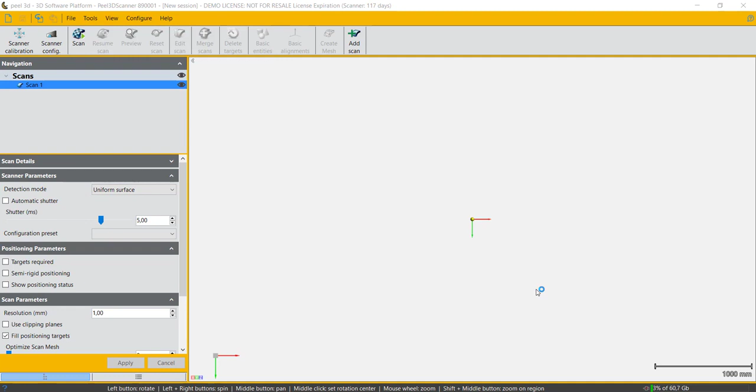Now in this video tutorial, I will show you a first glimpse at the Peel3D interface, how to calibrate your Peel3D scanner, and how to set your parameters prior to scanning. This here is the Peel3D software interface, and up here you have the toolbar. Now the toolbar is interactive, so it will change based on where you stand in your workflow.

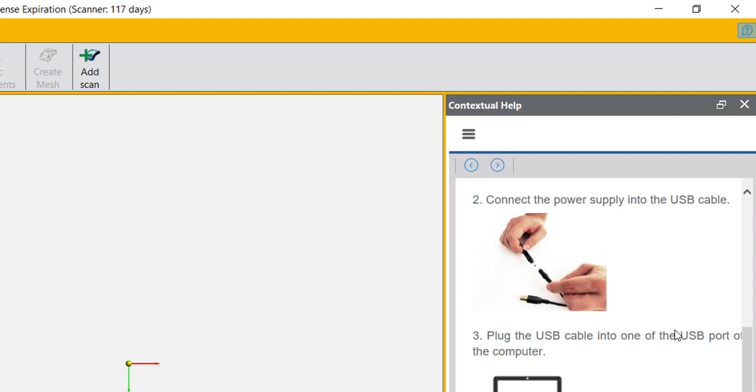On the right-hand side of the screen here you have the viewer. This shows the current status of your scan and your project. You can toggle the contextual help on and off using the question mark sign here on top of the screen. Now as the name implies, it provides contextual help based on the function that's currently selected. And finally, on the left-hand side of the screen here, you have the side menu. This is where you set your scanner parameters prior to starting your scan.

Scanner calibration is recommended every once in a while, especially after carrying your scanner on long distances or when accuracy of the model really matters. It's a very simple procedure and it only takes a few seconds to do. Take the calibration plate out of your carrying case, located under the protective foam. Open the box and lay the plate flat on a surface.

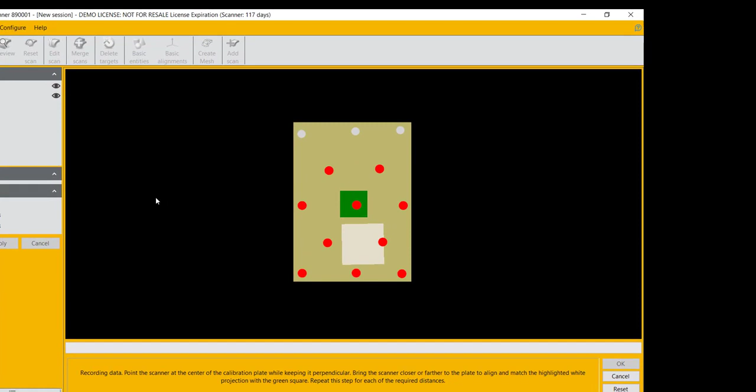Place your Peel3D scanner above the plate and press the trigger. The white square is the positioning reference for your scanner, and the green one is the requirement. Align the white square with the green square. Once the first position is reached, slowly move the scanner away from the plate until all positions have been captured. You are now ready to scan.

Before starting a scan, it's always a good practice to set the scan parameters from the side menu. Here's a bit more information on what the different functions do. In the scanner parameters, you have the detection mode. Here you can choose between uniform or textured. Uniform will provide better looking surfaces, while textured will perform better on noisier surfaces or with objects with higher contrast.

Here's a pro tip. Start by trying to scan your part in uniform mode. If the surface is too difficult to scan, switch to textured. Keep in mind that you can always change the scan mode as you're scanning. You can also change the shutter settings. A shutter is the length of time the camera sensor is exposed to light.

A short time will be ideal for pale surfaces, but might result in underexposed images on darker surfaces. A longer setting will work better on darker surfaces, but might result in overexposed images on light surfaces. By default, the automatic shutter will be checked, and the software will automatically try to adjust it as you go.

You can also get a taste of what the scanner sees by pressing the scanner config button. Now here the yellow pixels are ideal, the red ones are saturated, and the gray ones are underexposed. Using this interface, you can tweak the shutter setting to find the ideal compromise. Here's a pro tip. A default value between 4 and 5 milliseconds usually works great with about any surface except the very dark ones, in which case you'll want to use a value of 8 milliseconds.

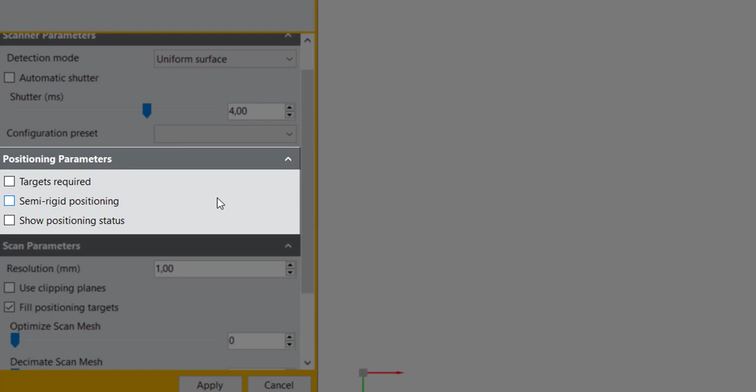In the positioning parameters, you can set the specific parameters related to how the scanner is positioned in space. By default, all these options will be turned off. Targets required will not use the geometry of the object for positioning at all. It will solely rely on targets. It can be useful to ensure the maximum accuracy of the product, but it requires the scanner to see at least 4 targets at all times.

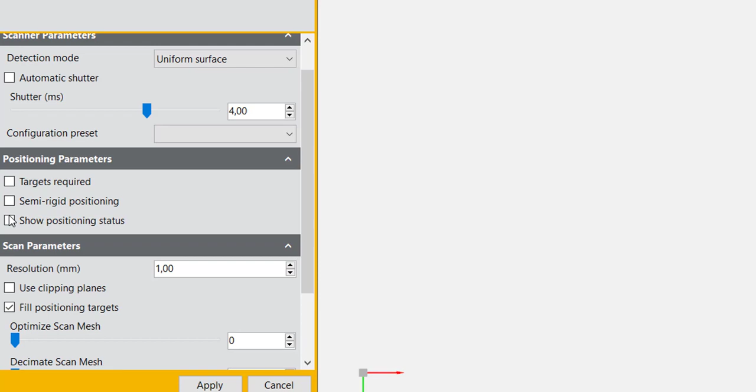Semi-rigid positioning will provide you with looser tolerances for positioning and will tolerate a bit of movement. This is very useful, especially if you plan to scan parts of the human anatomy. The Show Positioning Status checkbox will provide you with useful information when your scanner struggles at positioning. The arrows displayed on the surface will show you the slip direction of the part you're scanning.

Yellow is slippery but acceptable, and red will prevent the scanner from capturing data as it could be incorrectly positioned and corrupt the scanned data. This is something you will often see on flat or smooth areas. Using the positioning markers supplied with the scanner will allow you to scan these areas without a problem.

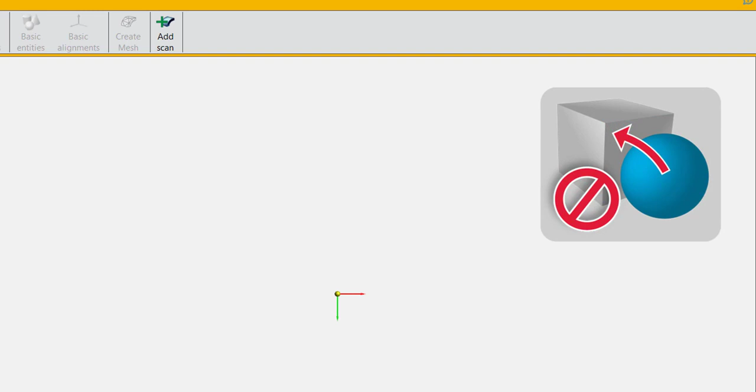Additional pictograms will be displayed on the upper right corner of the viewer and provide you with additional information. This means there's not enough data visible. This means the frame currently observed is impossible to position on the model. This is a recommendation to apply one or a few targets. And finally, this means a positioning ambiguity on the part.

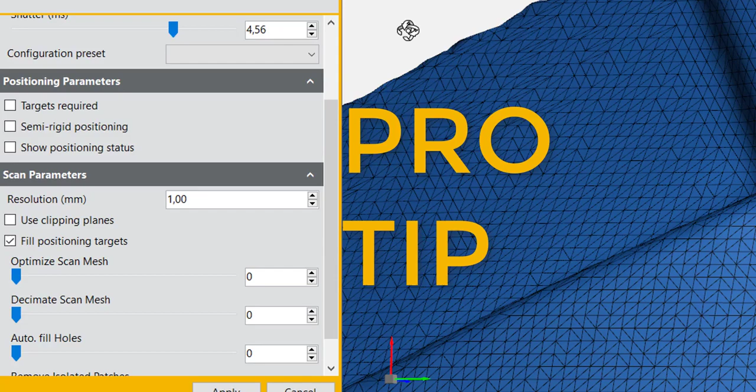In the scan parameters, you can set the resolution. This defines the size of the triangles that are going to be used to reconstruct the scan surface. A smaller value will show you more details, but require more computer resources. Here's a pro tip. If you wish to use a resolution under 1 mm, start by scanning your part with a resolution of 1 mm.

Trying to scan with a resolution under 1 mm will likely be too demanding for your computer and slow down the scan process too much. Once your scan is completed, change it to the desired resolution. The few parameters left are adjusted with sliders and have a value from 0 to 100. The optimized scan mesh is an intelligent smooth that's going to keep the edges sharp but smooth flatter surfaces. It's very useful when scanning design surfaces.

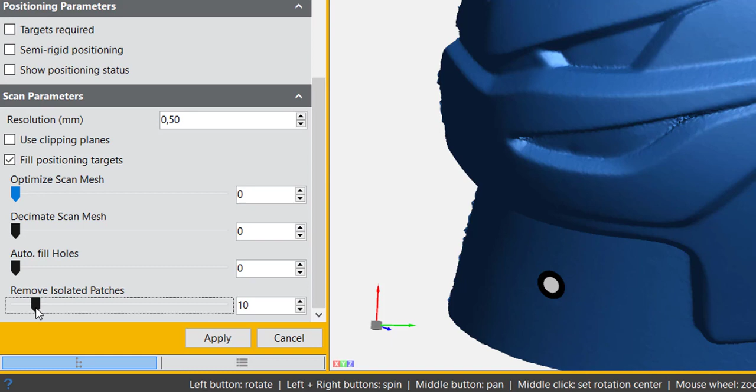The decimate scan mesh will reduce the amount of triangles based on surface curvature. The autofill holes will automatically fill small holes based on their size. And finally, the remove isolated patches will remove floating patches not connected to your main object. That's it. You're now ready to start scanning. And remember that you can always save your parameters as default, and that you can change the parameters on an existing session once the scan is completed.